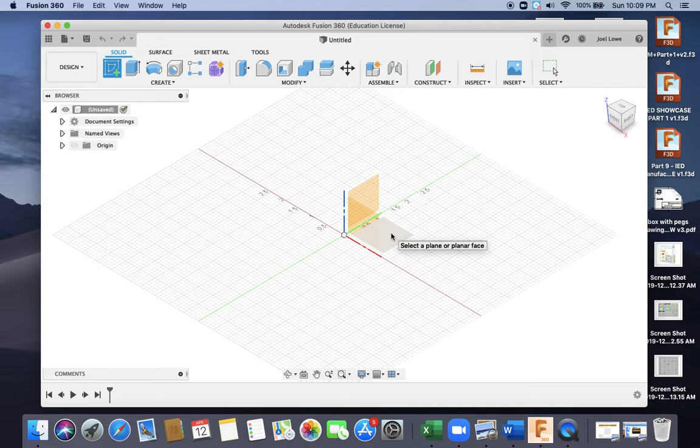First thing we're going to do is start a 2D sketch, hit the bottom one there, and I want to draw a rectangle that is upright, as is easiest for me. That is 2 inches by 1 inch.

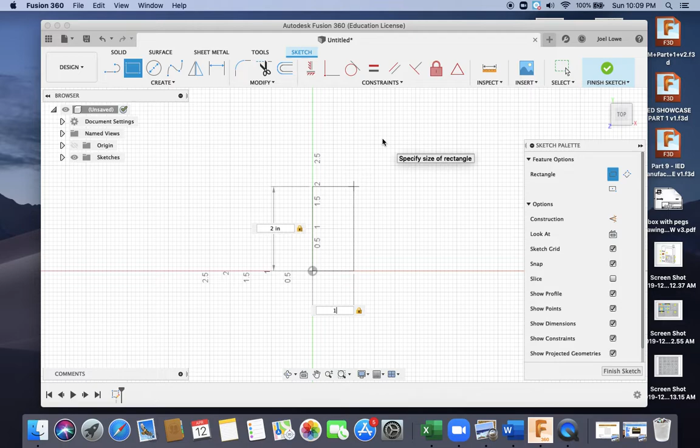Okay, so I've drawn the rectangle. Pretty small part, shouldn't be a problem though. Finish sketch, going to extrude it up, going to my drawing, 1/2 inch.

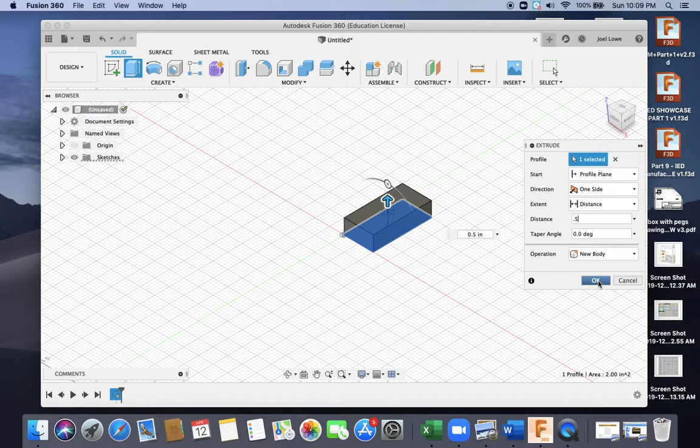Again, I am looking at another screen on another computer as I build this, just because it's easier to reference it. Okay, so I now have my square.

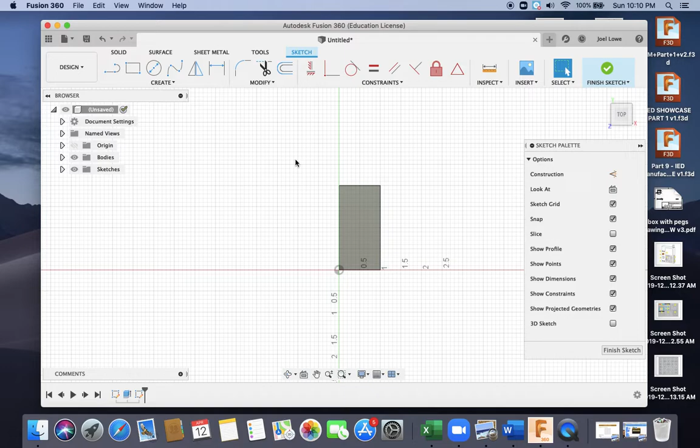So now I'm going to cut 2 rectangles. I'm going to create a new sketch, the top here. And it looks like they're 1/2 inch squares, so I hit rectangle, grab a corner. So they're 1 inch by half, so I hit 0.5, tab 1. Again, going to do the same thing for the bottom, 0.5, tab 1.

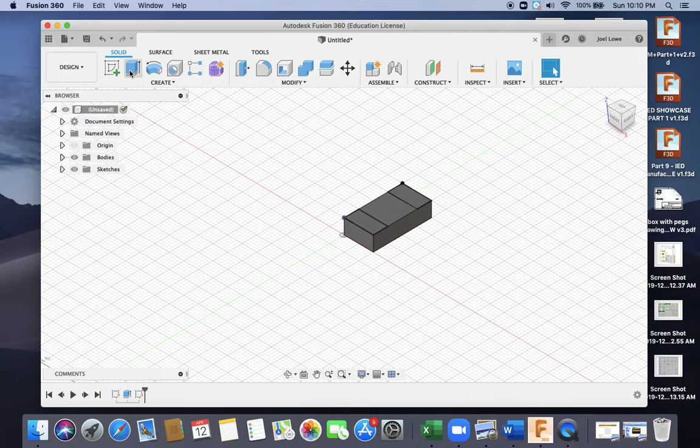Finish sketch, I'm going to extrude them down, I'm going to cut them. Looks like they are cut down 0.38. I'm going to assume that I mean 0.375, and remember that is a negative number. Obviously I didn't, so now I've got that cut.

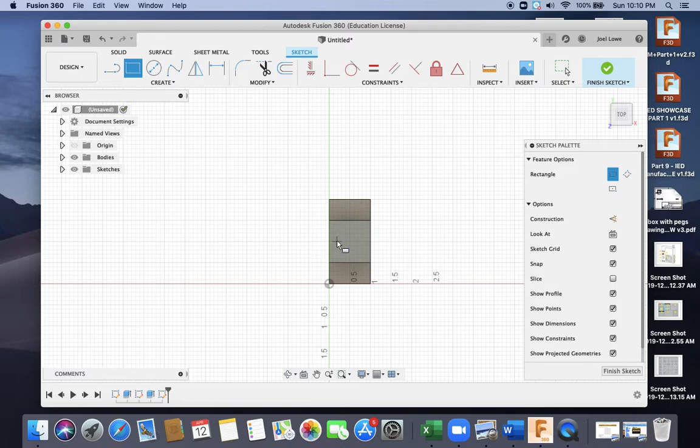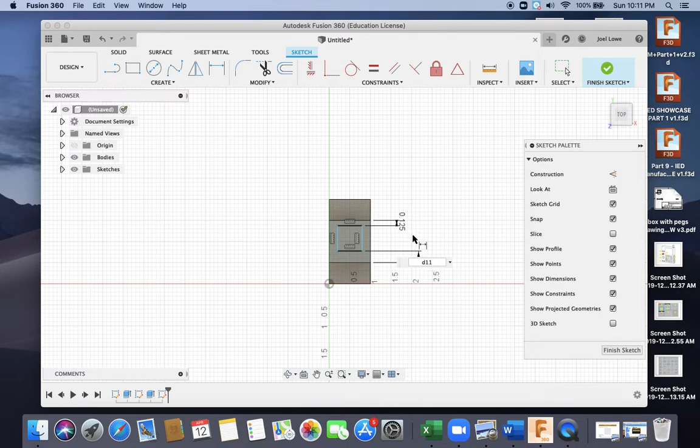Looks like it is a 0.75 rectangle in the center of it. So start a sketch, start on top there. So that's 1/8 on each side. So I'm just going to draw a rectangle, and then I'm going to dimension it from here to here at 0.125, here to here, 0.125. I'm just going to click, get this faster. Click, click, 0.125, and click, click, 0.125. Now that'll come out to 0.75.

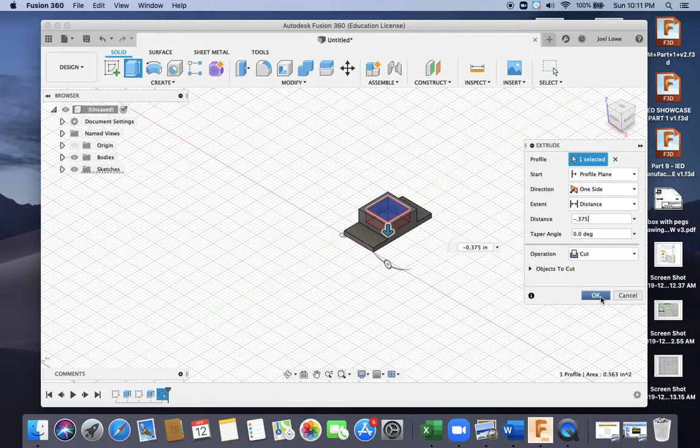So finish sketch. I'm going to extrude it, going to cut it again, negative 0.375. Hit OK. So the only thing I've left is the holes, and I have a little hole here, so I'll probably do it next because this is probably the most complicated.

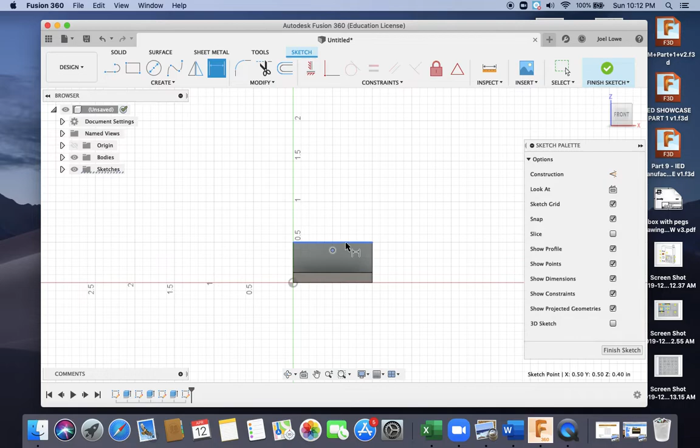So I'm going to use point just because it's easier in this reference. So I'm going to put a point. According to my drawing, it is 0.1 down and 1/2 inch over. So click in the center dot, click here, 0.1, and it needs to be in the center, which is there, which is 0.5.

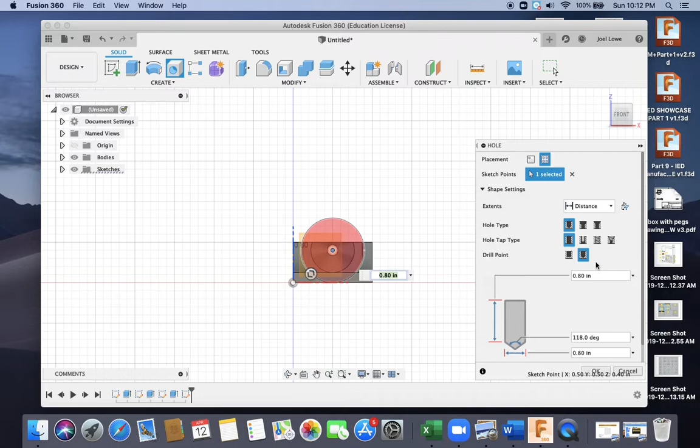Finish sketch. Going to use the hole command. It is a 1/8 inch hole, so type in 0.125. Now I highly suggest distance all, and I highly suggest clicking on that home button just to make sure it's going to go all the way through. So I hit OK. Now I've got the hole.

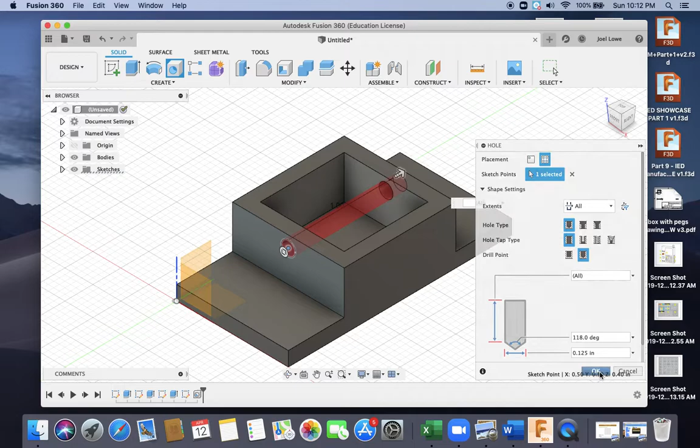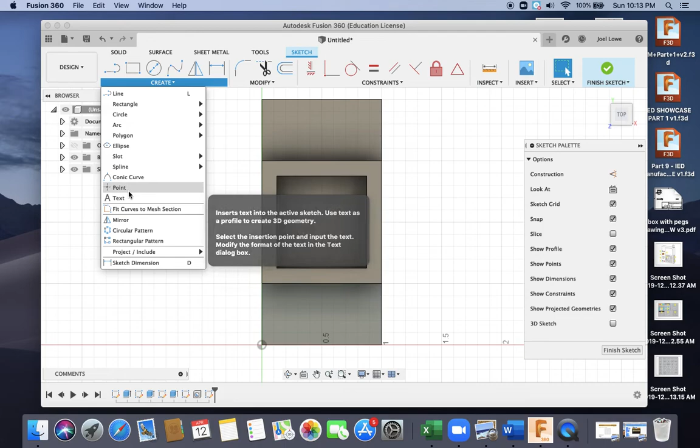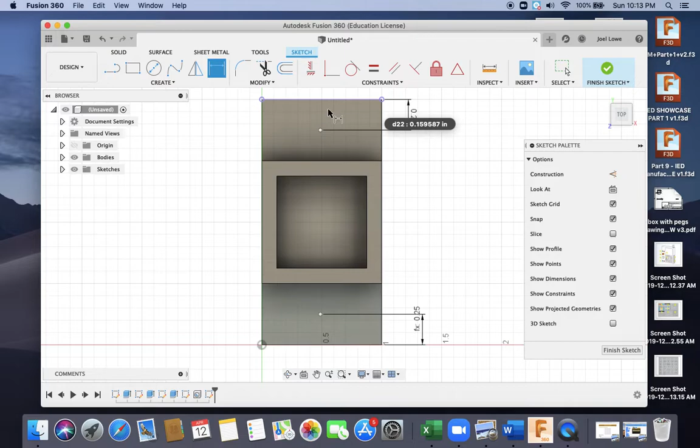Next, I'm going to put the new sketches, new sketch. I have 2 holes on each end. They are 1/4 inch holes. Probably use the point command again because it's just a little easier. So I'll just drop some points. Dimension, so from the edge it is 0.25. From the edge, I'll just reference it. And it looks like it's in the middle, so that is 0.5.

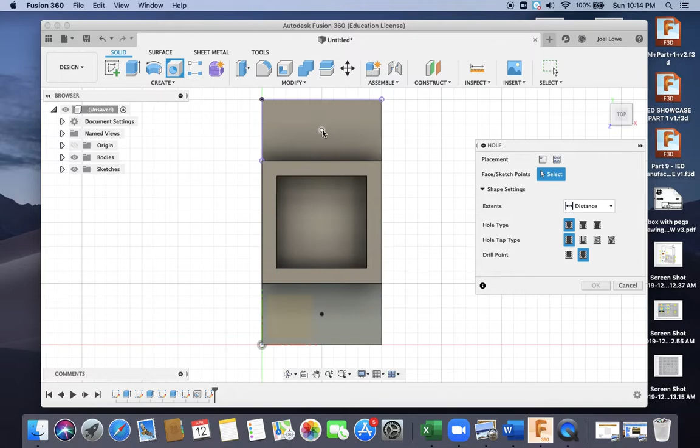Okay, looks good, finish sketch. Again, use hole. I am going to use a 1/4 inch hole, so I select my points. You notice it's still referenced from last time, 0.25. Again, I'm going to change it to all just to double check my math. And according to that, I should be good.

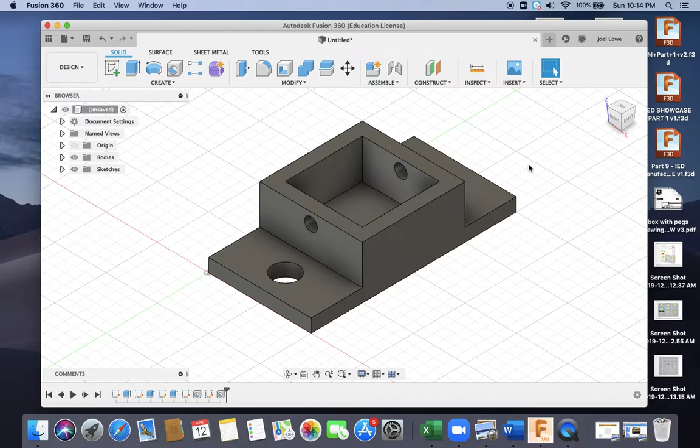That's the part. One thing that I always encourage you to do on these parts is go ahead and put the engrave. So I'll do that for you real quick. I'd probably just put it maybe right there.

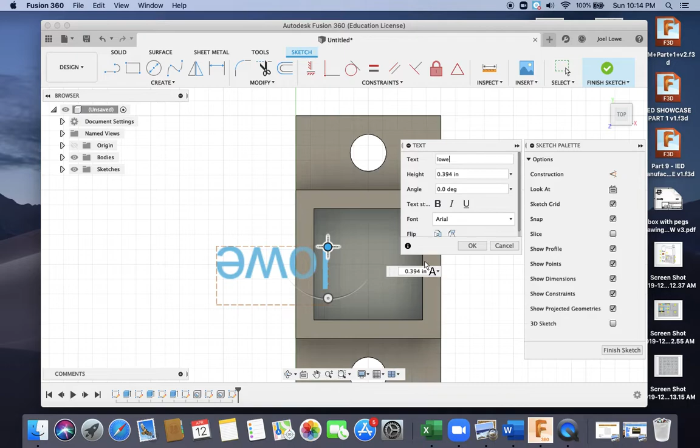I'm going to put a text. I'll put Lowe. And I'm going to rotate it around. It's too big, so I'm going to make it a little smaller. There. And so now I can finish sketch and I can extrude Lowe.

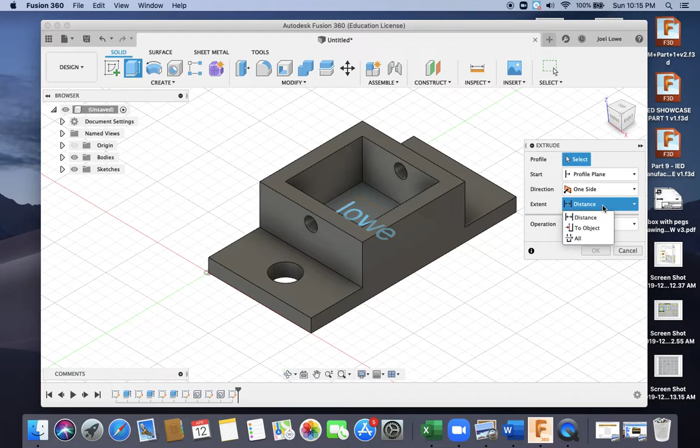So I want to use, cut it. Oh, it didn't select for whatever reason, I apologize. I have 0.0625. You can even go 03. I'll probably go 03, that's even less.

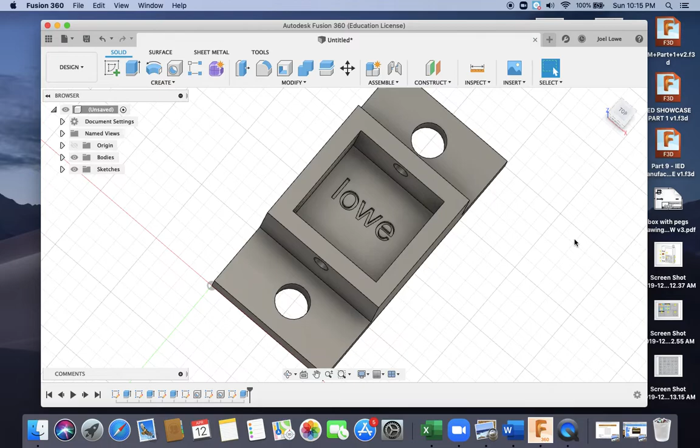And that means that part is engraved. And I could put a decal on it. I don't really have a decal on the bottom here if I wanted to get the most points for that project. Okay, that's it.